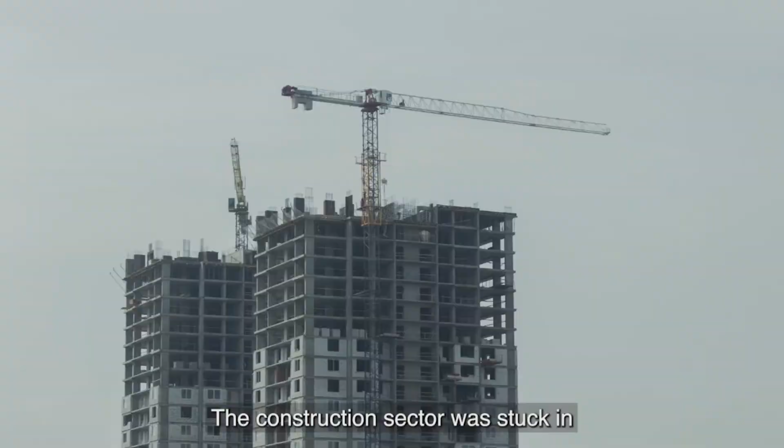The construction sector was stuck in a system that didn't work well for anyone, from the supply chain through to clients and even those using buildings. The system had evolved to produce the cheapest building rather than the one that provided the greatest value over its lifetime.

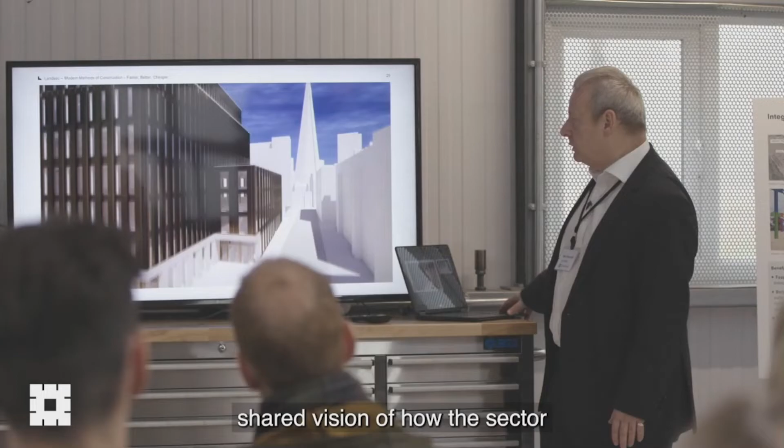The Transforming Construction Challenge was established in 2018 to accelerate the transition away from a labour-intensive approach to constructing buildings. It came with the largest investment in the sector by UK government in a generation, and a powerful shared vision of how the sector could better deliver buildings in a way that helped all of society, providing value over the lifetime of built assets, benefiting people using those buildings.

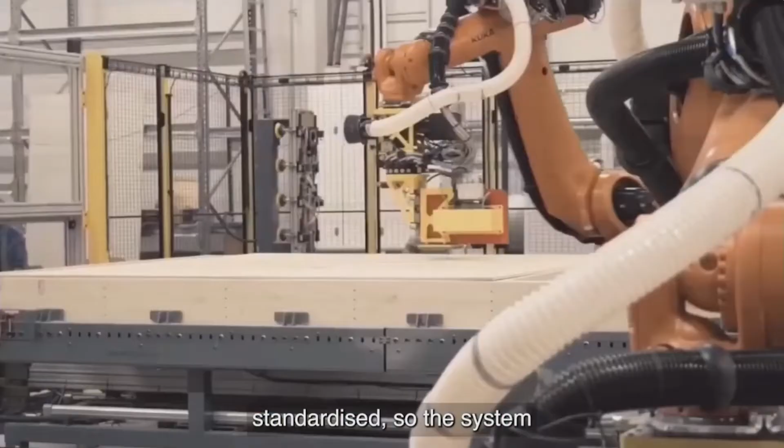Pioneers in construction collaborated with experts in manufacturing, digital and energy to develop new approaches. Build processes from supply chain through to site were standardised, so the system operated more like a factory, bringing greater efficiency and greater accuracy. Digital tools were adopted to better share information and track processes, to reduce wasteful steps. Renewable energy technologies were integrated into buildings to make them net zero, and part of the solution rather than the source of emissions.

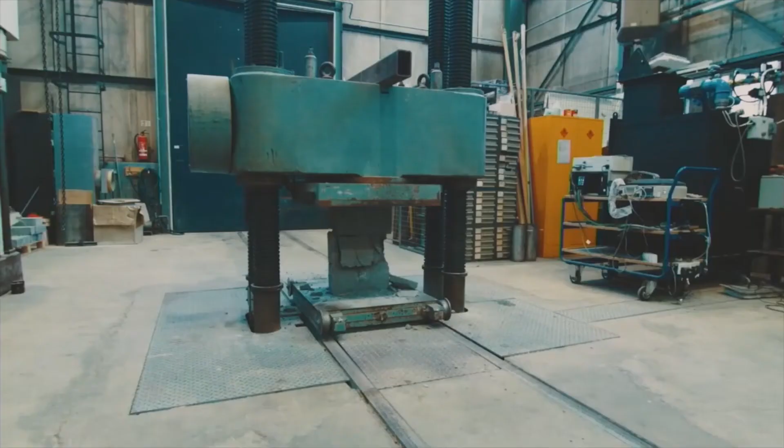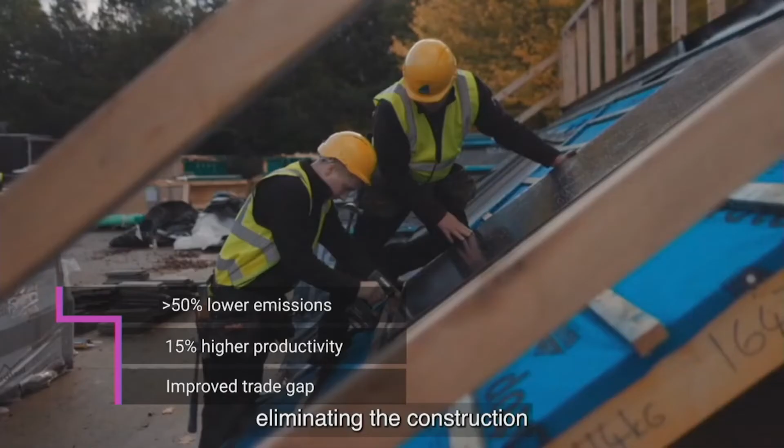The ecosystem to support this transformation has been put in place through an unprecedented collaboration between government and industry. Government procurement has changed to embrace new methods and provide the same global leadership it had in adopting building information modelling. The systems and evidence of success are now in place to deliver buildings and infrastructure 50% faster, more safely, at a third lower lifetime cost, and with lifetime emissions halved or even fully net zero, all the while eliminating the construction productivity gap with the rest of the economy and increasing exports.

Successes have been demonstrated across a range of building types.

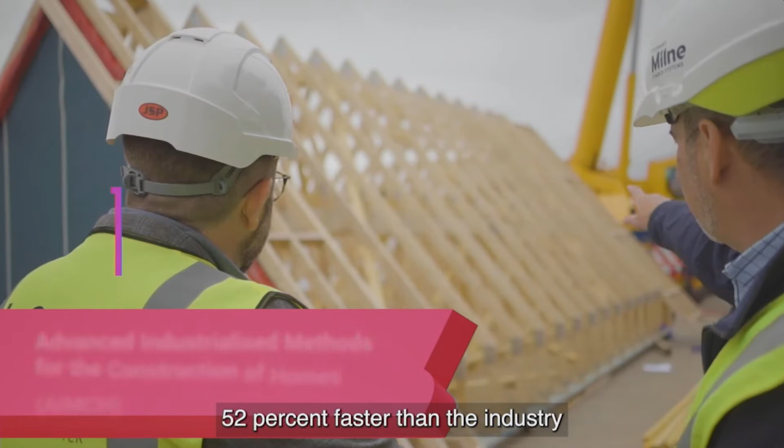AIMCH is building more homes 52% faster than the industry average with the same skilled workforce and at a similar cost. Our Sigma 2 closed panel system is pre-insulated in the factory, windows are factory fitted, the floor cassettes are pre-finished, and we have a ground direct roof system.

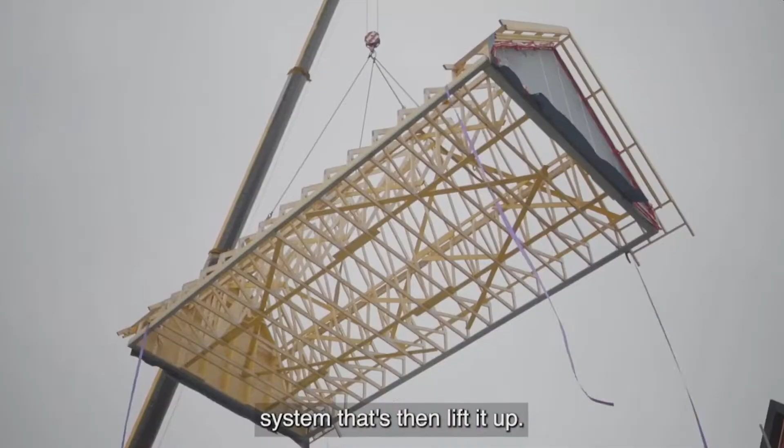The ground direct roof system is currently built on the deck beforehand. It's a structural timber system that's then lifted up. Through the project we're looking at innovations including demountable roof beams and pre-tiling the roof in the future, so we can tile it, put the fascia and soffit, and then lift the whole roof as one single module on wind and watertight, ideally without scaffolding.

The team led by Bristol City Council and YTKO have built Hope Rise, net zero carbon homes built over a car park for young people at risk of homelessness.

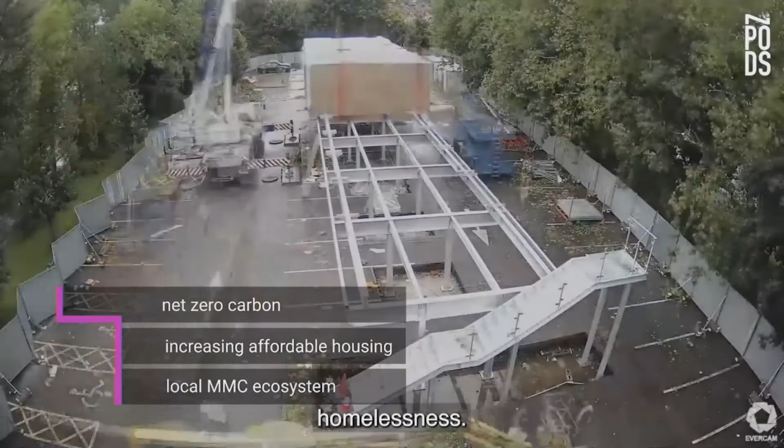It's a beautiful, spacious, peaceful place to live, and everybody that walks past is amazed and inspired about what can be done. It's awesome here.

We've got solar panels, we've got an airflow kind of heating system that's capturing the excess heat air and pumping it around the house.

The Active Building Centre is transforming construction and energy sectors by demonstrating and advancing best practice net zero carbon technology for active buildings, including a development with Flintshire County Council, meeting net zero at no extra cost.

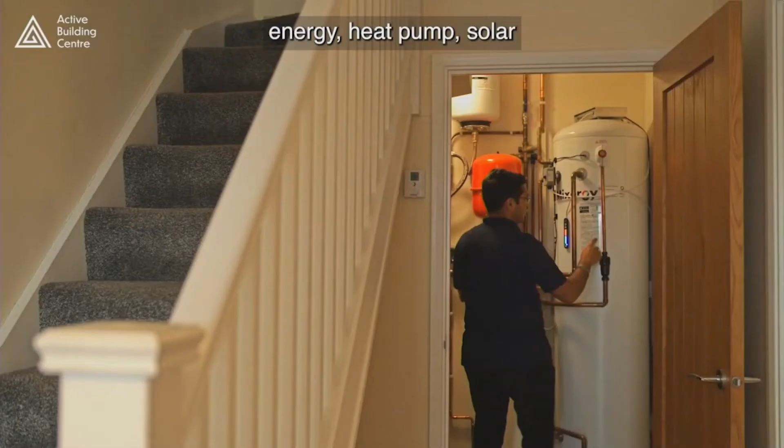It's 20 new social housing homes and they want them to be net zero carbon. In terms of clean energy, you've got ways to capture the energy, heat pumps, solar panels and so forth. You've got ways to store energy for when the sun isn't shining or the wind's not blowing. And then you've got control systems to make sure that you send the energy to the best possible place.

Global Home are leading the way in increasing productivity and quality in mass home building. These homes can not only improve lives now, but adapt to the lifestyles of households as they change and grow.

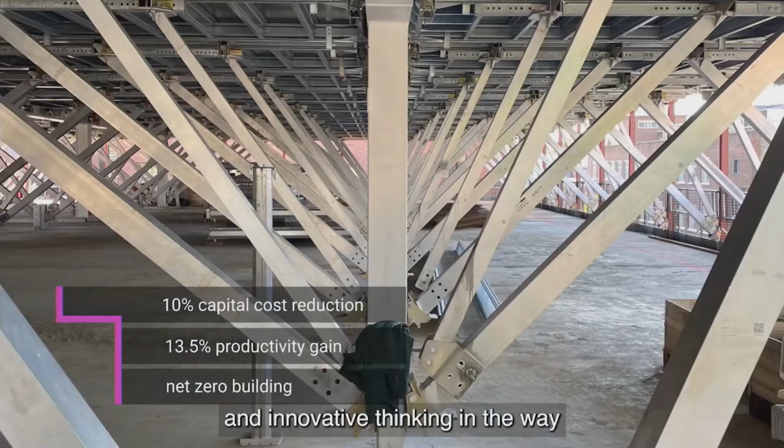The Forge, the world's first net zero carbon kit of parts office. This project really became a focus for our innovation and innovative thinking in the way that we need to design and develop buildings going forward.

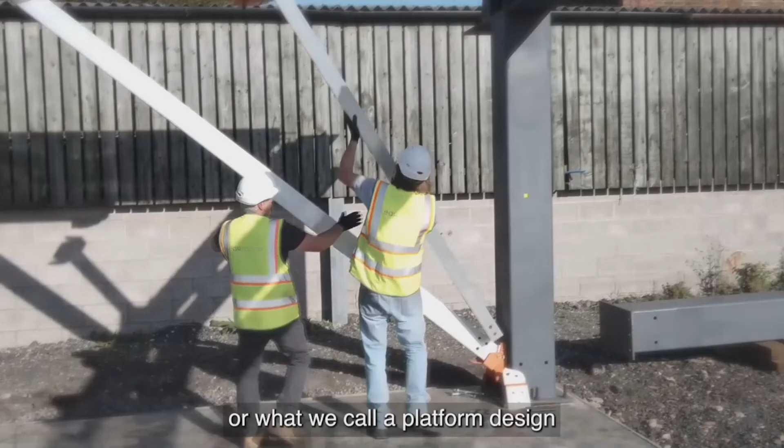At the heart of this strategy is the kit of parts approach to buildings, or what we call a platform design for manufacture and assembly approach. In the process of optimising the structure for the building, we've been able to minimise the use of materials, which has led to a significant reduction in embodied carbon.

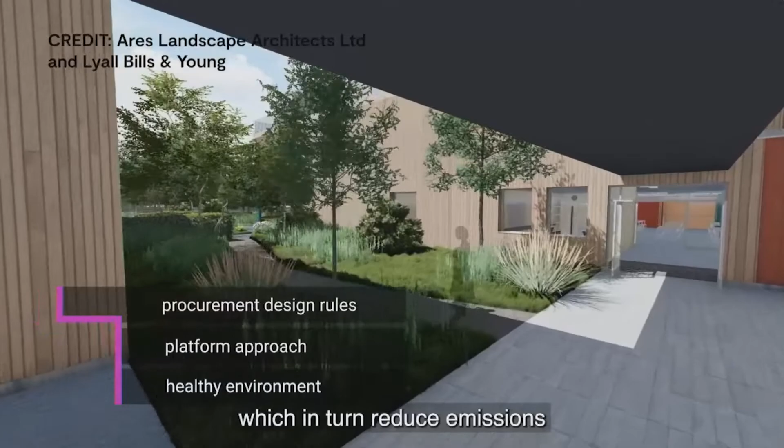The Department for Education has partnered with innovators to collectively invest £4 million in Gen Zero, transforming school buildings, creating new, improved design standards, which in turn reduce emissions and improve well-being for pupils and staff.

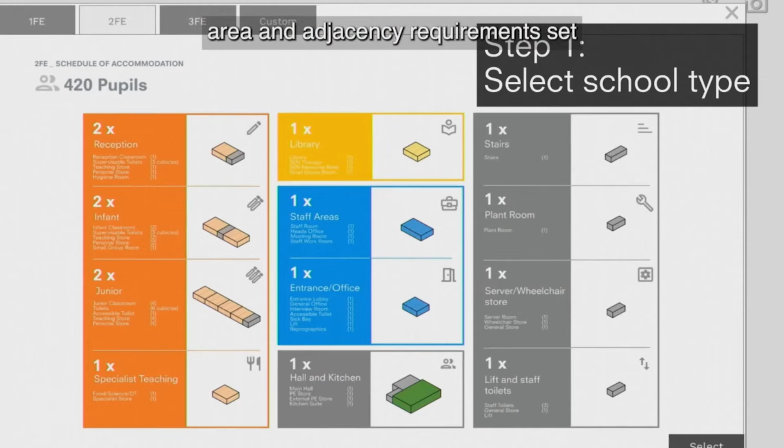Seismic brought together major supply chain players to standardise the design for steel framework used to construct schools. Seismic is delivering a 52% reduction in assembly time, digital designs taking minutes rather than weeks, and a 25% reduction in emissions associated with transport and materials. Traditionally, an architect will be employed to try and produce a feasibility study in line with area and adjacency requirements set by the Department for Education. This app seeks to pre-embed those area and adjacency requirements in the form of spatial design clusters.

TIES is delivering physical and digital demonstrators and data tools, improving productivity for the construction of transport infrastructure. The TIES Ava Footbridge approach will reduce embodied carbon content by up to 50% and operational energy emissions by up to 60%. The challenge addressed improvements across all phases of construction.

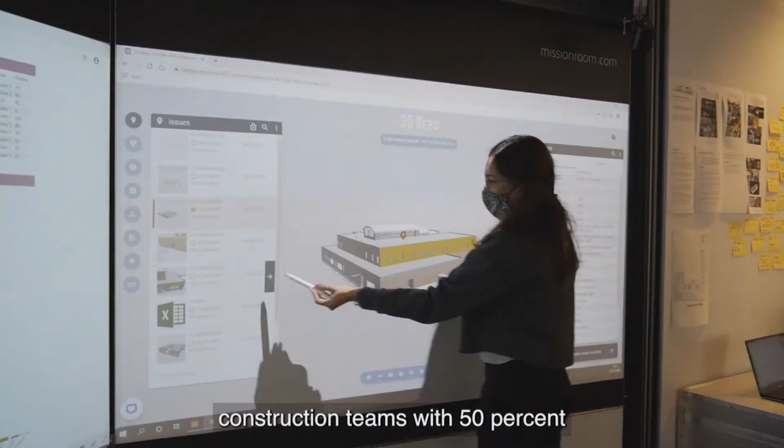The production control room provides construction teams with 50% more information, reducing daily briefings by 2.5 hours a week and resulting in a 40% reduction of time spent for planners. Reporting can now be produced at the click of a button, saving as much as 10 days on large construction projects.

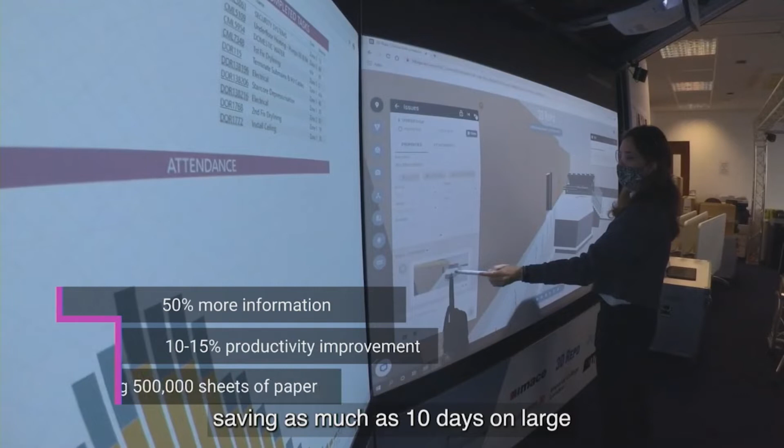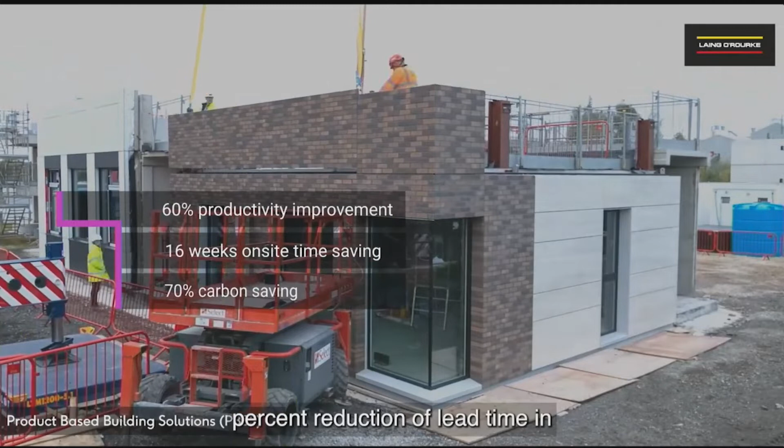Product-based building solutions streamlines the end-to-end project delivery process with a physically and digitally configurable kit of parts. It catalogues facades, structures, and mechanical and electrical elements, which can all integrate to form complete buildings. It means designers can not only select the best individual parts, but can make data-driven decisions about which components work best with each other and are most effective and efficient to assemble. The PBBS project has seen a 40% reduction of lead time in the manufacturing phase against an original target to reduce on-site building time by 30%.

And the learning camera, a camera monitoring system that learns to spot dangerous or suboptimal situations across a site, freeing up workers to concentrate on the task in hand. It also enables continuous remote monitoring.

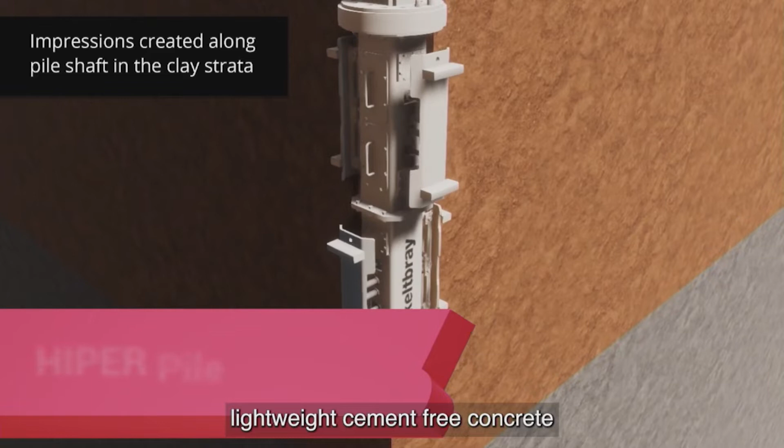HIPER Pile uses a hollow and impression pile design and lightweight, cement-free concrete to provide the same shaft-bearing capacity with fewer piles or narrower piles. The pile incorporates smart technology to monitor performance and integrate renewable technologies. HIPER Pile reduces materials and emissions by up to 80% and improves on-site productivity.

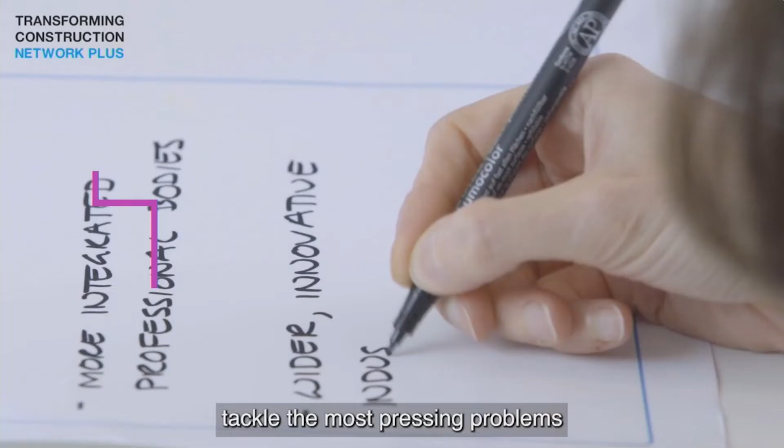The Transforming Construction Network Plus united academic researchers with industry and policy representatives to tackle the most pressing problems across the digital, energy, construction and manufacturing space. We're looking at a step change in knowledge and mindset and breadth of attitude, if you like, within our sector.

The Construction Innovation Hub brings together world-class expertise from the Manufacturing Technology Centre, BRE, and the Centre for Digital Built Britain. Value is key to unlocking the transformation of our sector. How we use it and how fast we can go requires all of you to play your part.

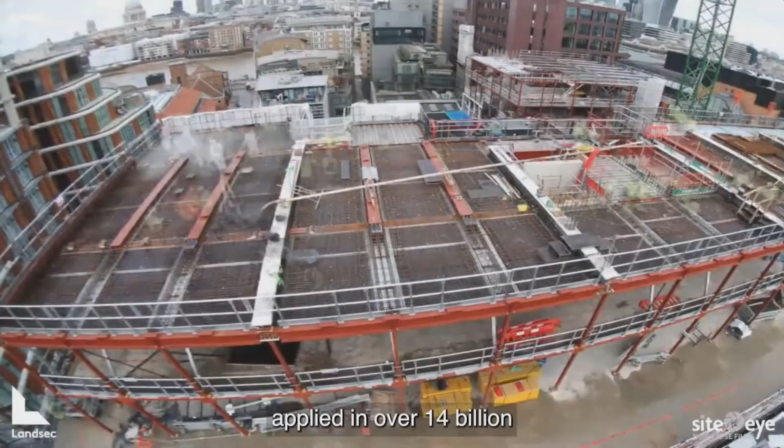The Construction Playbook and Transforming Infrastructure Performance Roadmap to 2030 are examples of UK government policy embedding this transformation. The results of projects Transforming Construction have supported are being applied on over £14 billion worth of developments, with the pipeline taking this over £25 billion in a few years. The shift away from delivering the cheapest building to providing value to society is accelerating.

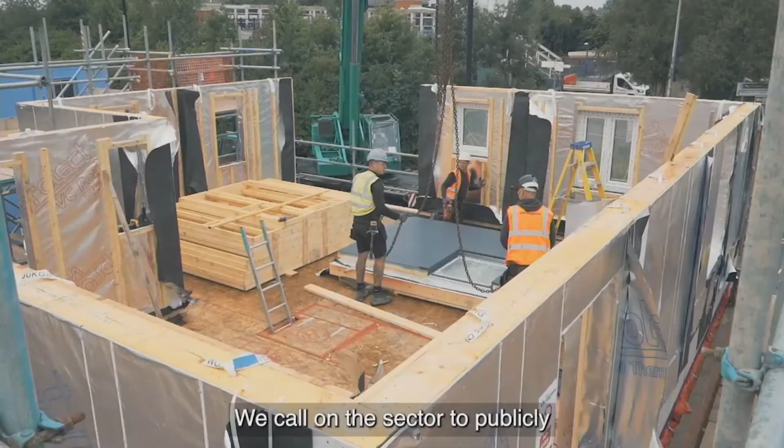How do we keep this transformation going? We call on the sector to publicly commit to platform systems, data-driven processes, and net zero innovation, embedding the impact of this unprecedented collaboration between government and industry will place construction as the exemplar in building back greener and better. Thank you to those of you who have been part of this challenge. And if you haven't yet, how can you be?

Thank you, Mike. It's great to be here today, and it's great to see you all. It is not that often these days that we get to talk to real people in a real place, and it's so wonderful to be able to do that.

One of my first visits as Construction Minister was to the MTC a number of months ago, and thank you again for hosting me. So it's lovely to be back again, and to be back on such an exciting day when we get to celebrate some of the successes which the construction industry is demonstrating and has shown, and see the foundations for a fantastic opportunity which the entire industry can take based on what the Transforming Construction Challenge has offered.

The government wants the UK to have the most efficient, technologically advanced green construction sector in the world. And it is through initiatives like this that we are able to take huge steps towards achieving that over the long term. When UKRI and Innovate UK began the Transforming Construction Challenge in 2018, they were tasked with revolutionising the industry. Through the challenge, we have accelerated industry modernisation towards this aim, reducing the whole life cost of buildings whilst increasing the sector's productivity and sustainability.

So the first thing I want to say as the Construction Minister, and being very proud to be here on behalf of government today, is thank you for everything you have done over such a long time to make this possible. You have demonstrated with your teams and your commitment and your initiative and your resolve, you have shown a journey, a way forward, which allows this industry to continue to transform in the years ahead, on top of all of the fantastic things that we have already seen on the video. So the first and most important thing I want to say is thank you.

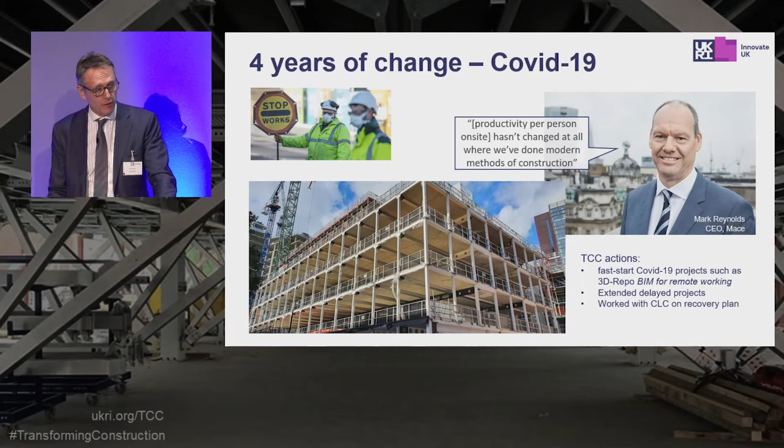The housing crisis was a priority for government following the 2019 general election. That immediacy meant that we needed to build more homes with the existing workforce, the key aim of our flagship AIMCH project. We also supported multiple projects on affordable and social housing. You've already seen some of these in the video.

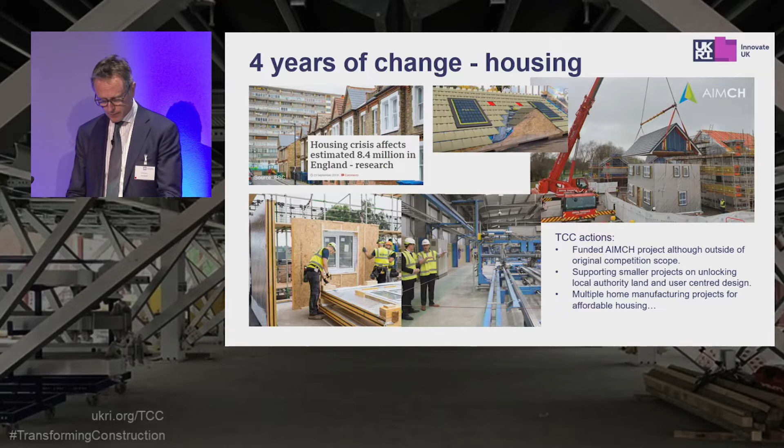These projects all use advanced modern methods of construction solutions to provide affordable housing. The IDEMA project is inspired by the Rubik's Cube and flat pack furniture to create easy-to-assemble homes. West Midlands DFMA is delivering factory-built social housing at scale and developing new regional supply chains. STELLAR has created hub factories, supplying regional spokes to satisfy those areas with the highest demand using local trades.

The CoLab Toolkit was developed to improve sharing of supply chain information, so housing projects are completed faster, at higher quality and at lower costs. And Project Ignite has developed a digital tendering and scheduling platform for housing associations using MMC, led by Places for People.

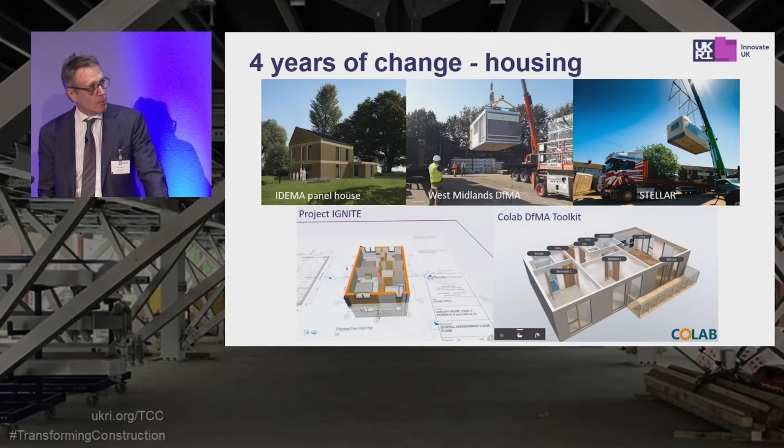We're proud to have developed a portfolio that is delivering some new solutions at all stages of construction: design through build and into use. Designing for whole life value, and in particular lower carbon emissions, needs new tools that work with existing design processes. From RIBA to Reality looks to embed better decisions at all RIBA stages to improve user productivity and reduce carbon.

Digitally connected supply chains help them see how a client wants the building to perform and suggests improvements. Cost and carbon calculator makes it easy for engineers to reduce embodied carbon in new buildings and keep costs down. And the AACE project has automated the mapping of cost and carbon into BIM models using artificial intelligence, enabling faster, better design choices.

Construction projects are complex and involve data from many different sources. The challenge supported a number of projects to automate bringing data together, to use modern digital tools so projects can be better planned and faster executed.

Moata developed an end-to-end custom information hub with Mott MacDonald. DCOM has digitised and automated compliance checking. AutoBIM was developed for Balfour Beatty to make completing BIM data easier and then automatically generate insights.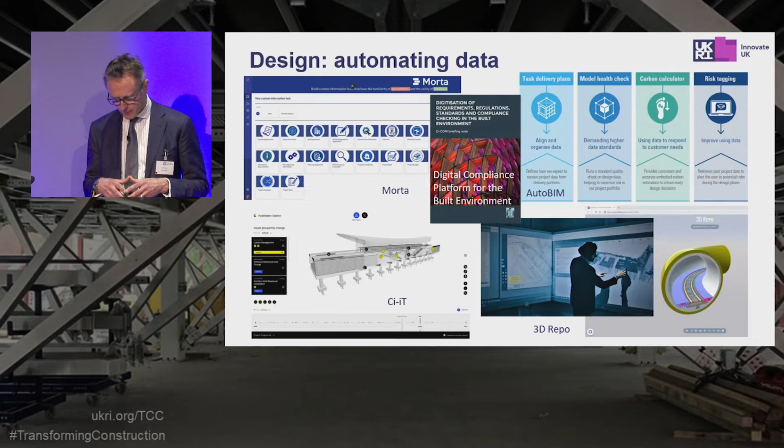Off-site manufacture of components is opening up the opportunity to automate processes for higher productivity and lower costs. HIBIS stands for Hybrid Insulated Steel System, an off-site component system combining light gauge steel with a mineral foam called Aerium. It overcomes the challenge of achieving high fire protection on multi-storey buildings at scale.

The Increasing Productivity through Off-Site Steel Modules project provided a set of design and construction prototypes to drive greater adoption. Tata Steel have led the Fast Truss demonstrator project to robotically weld steel trusses, automating their design and manufacture. Future Joinery Systems have done something similar for their bespoke joinery work, using algorithms to automate the design of complex geometries at the push of a button.

MART is a project to develop a factory and a shipping container for localised manufacture of carapace slates biocomposite roof tiles that are made using waste from Welsh slate.

Advances in technology mean data on a construction site can be used to better manage flows of materials and accommodate site conditions. So we've got the Weather Ledger, a data-enabled system that can automatically trigger weather clauses when terms are breached, avoiding contractual disputes. FairCop uses LiDAR technology to access real-time 3D data on localised wind speed and direction to maximise the productivity and safety of cranes on site.

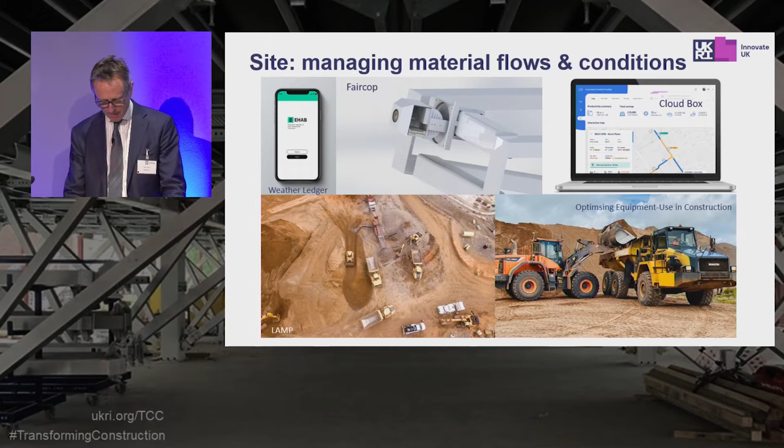Digital tools can also be used to plan and track progress across sites. We've got Aquila, which combines 3D models of a site, scheduling plans and real-time data from the project to synchronise activity and sequence equipment use to eliminate redundancy.

Plasma is a digital platform that uses digital data to map the most efficient programme to improve productivity right through the supply chain.

Contilio's intelligent control room uses LiDAR, laser scans and 360-degree photos, then compares them with the BIM model to track progress and highlight errors. And One Source of Truth is a project led by BAM Nuttall to build on the Learning Camera project and automate data collection through cameras to track progress by various project partners and minimise disputes.

A big part of the challenge approach is not to move construction sites into factories, but to apply manufacturing discipline at all stages, even on-site.

Adaptive learning for zero defects is a tool to ensure tasks are done right first time. It adapts to users' ability for action learning on the job. Further stage is HoloSite's augmented reality hard hat. It creates a hologram of the 3D model for the user, avoiding the need to interpret 2D drawings.

In a similar way, AROPCOA sends instructions directly to operatives who see them projected as 3D images. The headset also records video feedback for quality assurance. This is being trialled on the Hinkley C nuclear power plant.

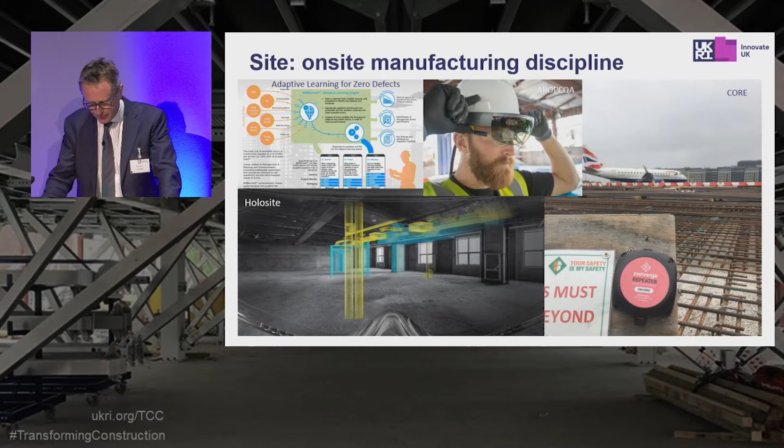The challenge has supported research to improve energy use in buildings. Heat 3D can quickly measure energy performance of a building in 3D. Traditional methods look at single points only and can cost 10 times as much as this. This will help measure and eliminate the performance gap between how a building is designed and how it operates. We worked with BSI to produce a standard for evaluating this gap.

The Active Building Centre works to make net zero buildings a reality via the capture, storage and control of clean energy. Alongside that, the Active Building Centre research programme is working with the Welsh Government on their commitment to net zero in a number of ways.

Gathering data on real-world performance of carbon-reducing technologies on the 2,000 homes under the optimised Retrofit programme and the new homes under its innovative housing programme.

ABC research programme is also running Behind the Meter Billing, a dynamic living lab collecting data about active buildings at community level to enable localised energy trading.

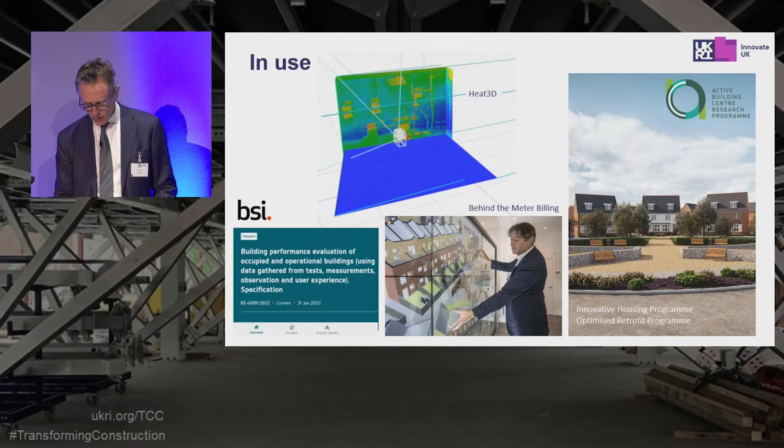So today we're handing all this information over to you. The groundwork is laid. These foundations will enable a stronger future for construction. The Transforming Construction Challenge has provided you with the methodology for value and platform approaches. It has proven and demonstrated that platform methods and active building technology can help us reach the targets we're all after. And with government, we've shifted the procurement of public buildings.

The stories and data these investments have produced are yours. Building on these foundations, we call for the sector to commit to the brighter future that we've all worked hard to make possible.

Achieving the full impact requires a cross-government approach to platforms, standardised assemblies and interfaces, with government suppliers and their clients using Transforming Construction Challenge outputs in line with the construction playbook to deliver the Transforming Infrastructure Performance targets. So thank you to everyone here, and thanks to my amazing team, without whom this wouldn't have been possible.

So thanks, everyone. It's been a great journey.

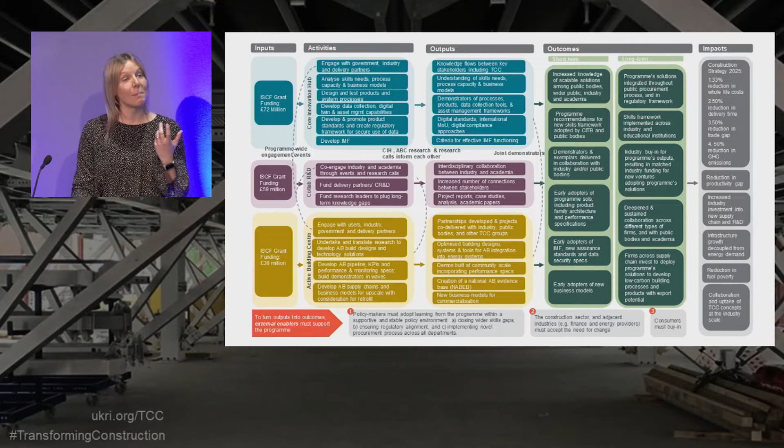This rather complicated looking logic model is how we have gathered that data and the assessments that Frontier Economics and BMG have used. Our benefits data, which you hear us talk about a lot, are based on this, and Frontier Economics' research was done via a combination of survey and expert panels. But I hope you'll see that the previous slide and this one, in terms of the themes and headings, are what we have based our assessment on.

I really hope you'll also see that when we were devising this with Frontier Economics, we really chose measures to help us understand the degree and extent of real-world take-up of these concepts. So we sought to increase and improve collaboration between construction, the energy, digital and manufacturing sectors, as well as with academia and government. And what we found from Frontier Economics' report was that collaboration has been higher for those that were successful in applying for funding.

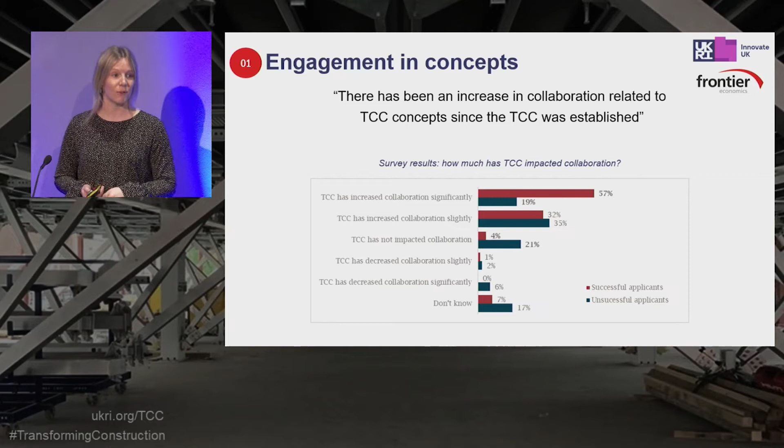We did seek wider engagement, for example through the Transforming Construction Network Plus and the Future of Consultancy programme with the ACE. We knew from the start that to be successful, we needed to see real-world application of TCC concepts, and for this to happen, procurement had to change. So the challenge worked with clients, in particular with government, to really raise levels of understanding and the potential benefits of procuring for value.

As part of Frontier Economics' report, they interviewed a number of stakeholders, some from the Department for Business, and I have a quote here that says: "Overall, we are seeing a big cultural change which is guided towards outcomes rather than inputs, and we are expecting a very positive impact from it."

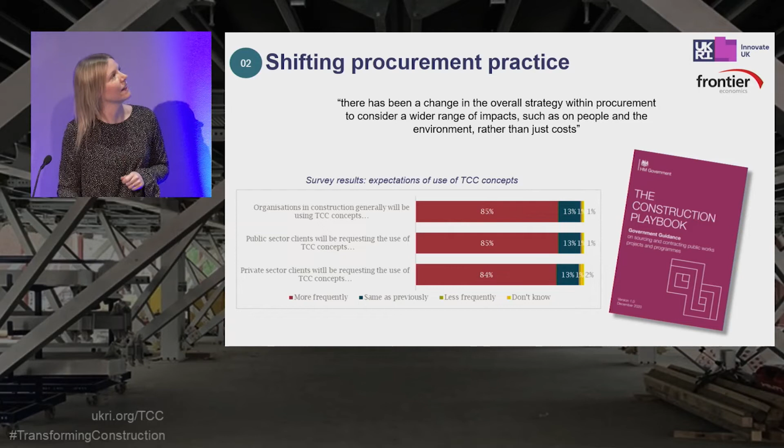The Construction Innovation Hub, in particular, worked really closely with government departments and helped write the construction playbook, which embeds TCC processes. Another quote from said BEIS stakeholder says a whole load of things are driving cultural change, for example worries about global warming. TCC is an important element of this, and without TCC we wouldn't see progress in quite the same way. TCC is good at bringing industry and government together. So if you were said BEIS stakeholder, thank you very much.

Now, we know, and you all know, that we set out to invest £170 million of public money, and that was to be matched by £250 million of investment by industry. The report finds that this will be met this year, but importantly, that industry investment will rise to over 800 million by 2027, something we're really proud of.

Examples of this include heavy investment by Stewart Milne, doubling their capacity in their timber systems; Future Joinery Systems, doubling the size of their team and their investment pipeline year on year; and Hadley Group, who have already acquired a new factory.

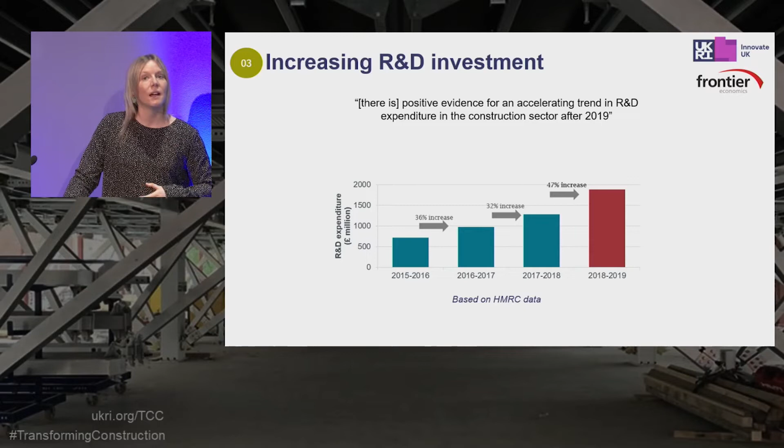We also all know that the sector works to tight margins, and the R&D of this type that we've supported needs to be applied on real buildings. Despite some of these potential constraints, we have seen leveraged investment across industry. The report found that some projects and businesses ended up spending 3 times the amount of the original commitment.

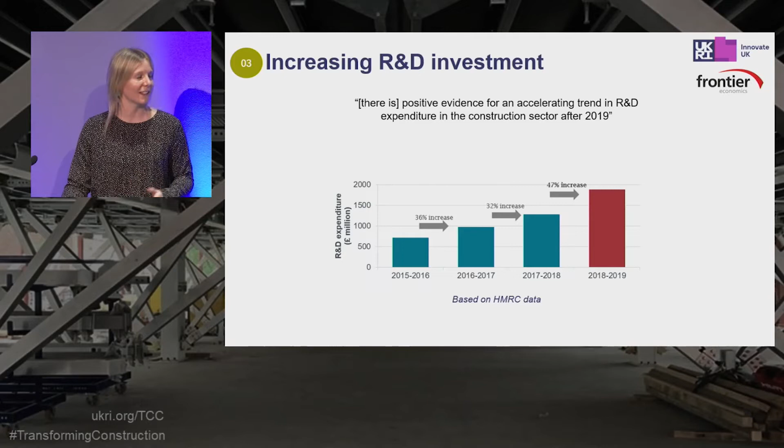Because of the strategic importance of the results, Laing O'Rourke, as leaders of the product-based building solutions demonstrator, are a great example of this. They have gone above and beyond when it comes to investing that commitment from industry. The concepts we've supported are new ways of working for the sector, and the challenge has helped accelerate a transition that was already underway.

This hasn't been about theoretical solutions, but real-world application. We've worked with early adopters and innovators on the diffusion of innovation, working to move towards the mainstream and that early and late majority. Uptake is resulting in high levels of real-world application on major projects, helping us towards the levels required for that tipping point and getting past the chasm on the diffusion of innovation.

Overall, successful applicants reported greater impact on annual revenue after engaging with the challenge. On surveying TCC participants on the impact of challenge concepts when used at scale, 92% reported a positive impact. Contilio is a great example of this, having run a very successful fundraising round in 2021 and securing a number of global clients.

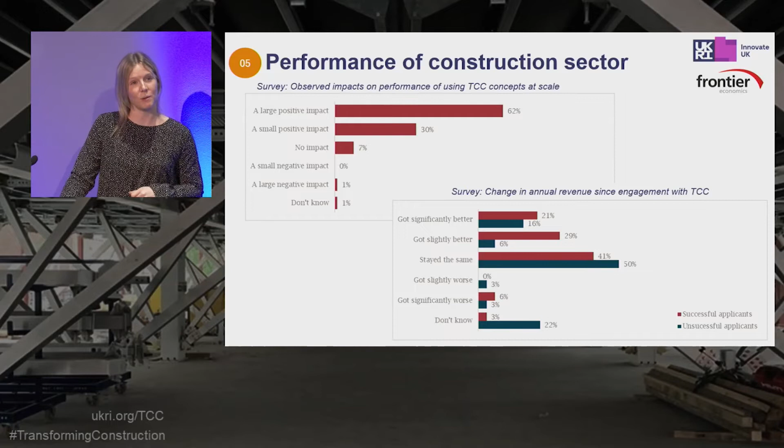So as you've heard, we set challenging targets for the value of real-world contracts being deployed on challenge outputs, and we're really proud that these have all been surpassed. You also all know that the construction sector generally lags behind by about 15% when it comes to productivity.

Billions of pounds worth of projects are closing that productivity gap, and the Forge is a brilliant example of that. The world's first net zero carbon kit of parts office is already realising around a 13% productivity improvement, but is striving for 35% productivity improvements. Some of our more recent data is already seeing greater improvements in productivity.

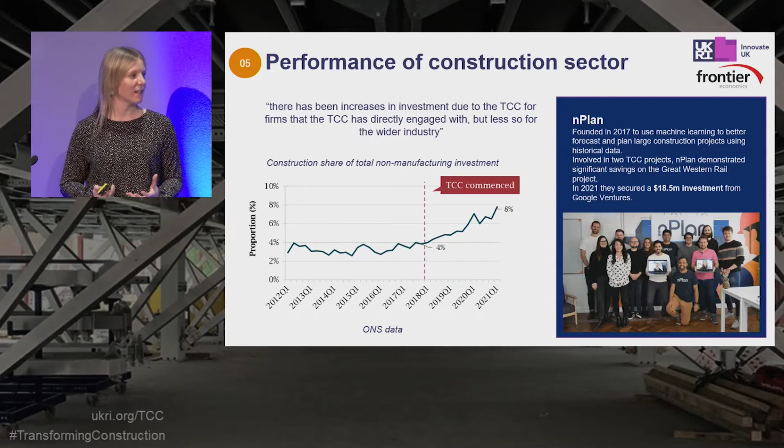The success of projects that we've supported has led to an increase in investment as well. A brilliant example of this cross-sector success is nPlan, who have been part of 2 of our projects. Last year they received an $18.5 million investment from Google Ventures, such a great example of the commercial value and worth of the projects that we've supported.

The challenge is forecast to deliver a £200 million improvement in the trade gap by 2026. And Converge, who have been part of 3 of our projects, are already delivering in Asia and have recently signed deals in Australia and New Zealand.

When it comes to improving the delivery of built assets through the reduction of whole life costs, the report estimates the savings generated from projects already underway today will more than cover the cost of the challenge investment. Specwall load bearing is already realising a whole life cost reduction of 60%, and we are already seeing even better improvements here as well, with improved delivery of built assets rising to 200 billion by 2027, something we're really proud of.

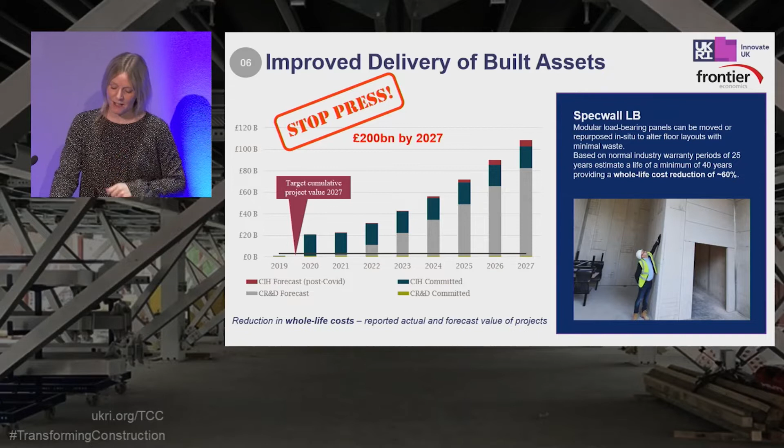Similarly, when it comes to the reduction of delivery time, you saw the TIES Living Lab footbridge approach in the video, realising a 66% reduction in their demonstration time, 12 weeks assembly as opposed to 35 weeks. What that means in real life is less disruption for users, and buildings and systems working better for people. Already we are seeing a reduction in delivery time worth £400 billion by 2027.

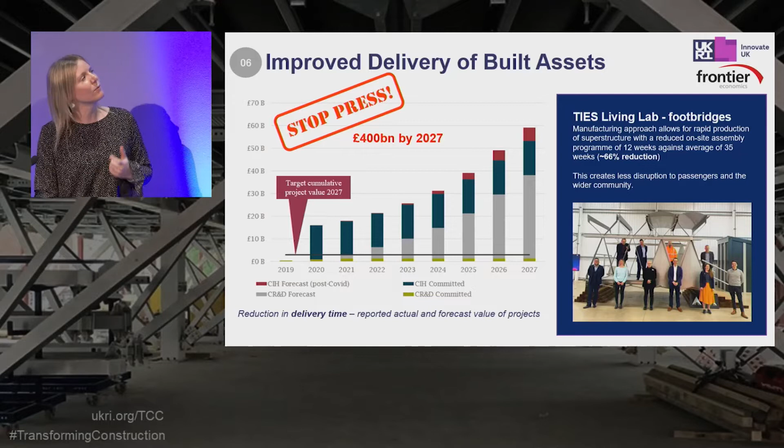Importantly, reduction in delivery time needs to go hand in hand with improved environmental performance, and that's something we've seen through Future-Proof, new investment models delivering net zero emission homes with guaranteed running costs, and the active building centre's work with Flintshire County Council, building affordable net zero homes at lower costs than previous methods.

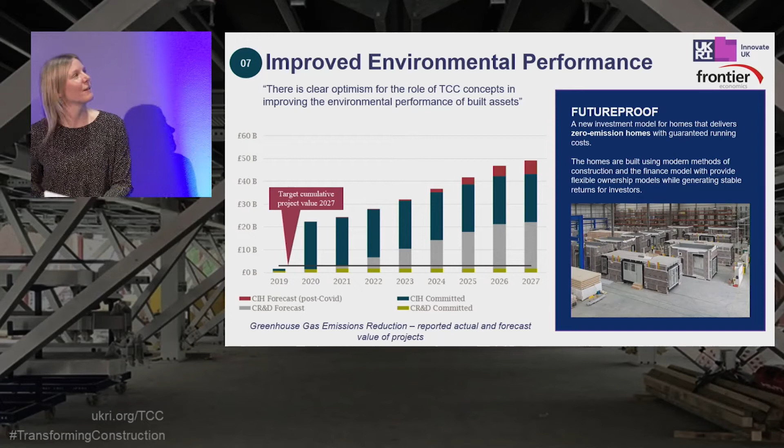So I hope that I've left you wanting more. I hope this has felt too quick, because I really want you to take a look at this report for yourself, read it, take it in and understand it from your perspective as well. This is a snapshot of the quantitative external proof of the challenge, but I'd also really encourage you to take a look at the richer stories and the qualitative progress as well.

The Transforming Construction brochure is outside for those of you in the room, but also able to access online. I'm sure everybody, and livestreamers in the room, has heard Mike and I talk about the Transforming Construction Stories catalogue. It is there for you to use to build your stories of innovation as well. So the groundwork has been laid for industry to continue to build on it. Thank you very much, and I look forward to continuing the conversation.

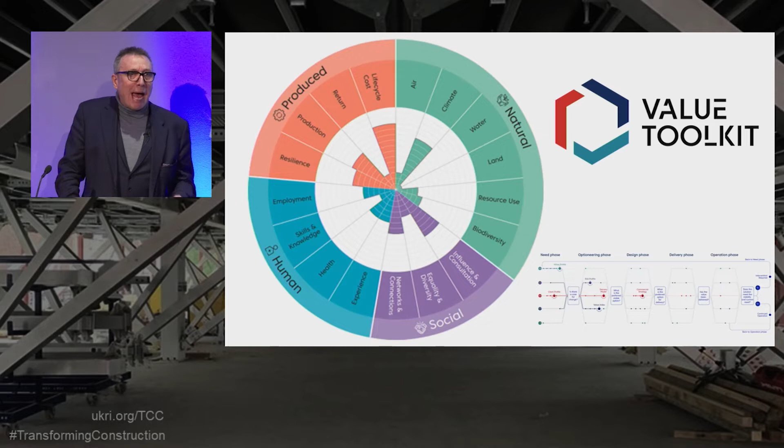We also have an engaged and enthusiastic industry that recognises the need to change, and are proactive in seeking ways to do it. It's been a real privilege for me and my team to work with so many inspiring and progressive businesses. We know capability and capacity in the market must grow so it's able to meet the ambitions of this challenge in full. It's encouraging that we are already seeing this growth, and it will continue if we maintain the collaborative spirit and ambition of the past few years.

The groundwork has been laid. Fantastic progress has been made, and we must continue to develop these solutions, to embed them at scale, and to build capability and capacity in both clients and the supply chain.

How do I see the future? My vision is for a better built environment delivered by a transformed sector, with a strong and supportive policy and regulatory environment, widely understood and consistently applied, with clients seeking value and performance, using digital tools and data smartly, not buying cheapness and inconsistency, with UK businesses, large and small, confident to invest, applying the innovations enabled through this challenge to reduce carbon, improve value, and much more. And a thriving sector that attracts and develops the best talent and that better reflects the society we all serve.

If we can build on the great progress made, rather than basking in the achievements to date, then we will cross that threshold. Together, we will deliver a built environment that creates real value for our society. That's what I'm passionate about. That's what the Construction Innovation Hub wants to see. And it's a vision we can and should all get behind.

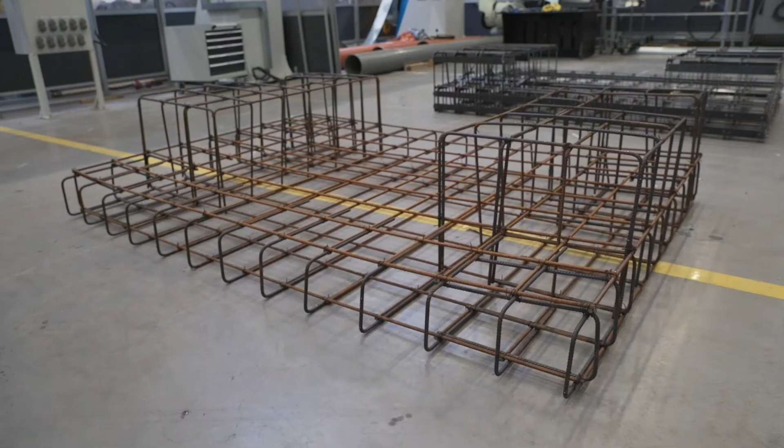One example of where the digitally connected laser cell is currently being used is to cut sheet metal for laser cut reinforcement. This is an alternative approach of reinforcing concrete. In the display area, you'll see 2 different methods of reinforcing concrete.

One, which I think you'll agree, is much more recognisable and traditional in its approach. This is made up of low-cost material which is assembled by a highly skilled workforce. The workforce often spend long periods of the days in positions that are detrimental to their long-term health. This, coupled with wet, cold, muddy conditions, often leads to high levels of variation in the final assembly.

The alternative laser cut reinforced cage is an example of where the Construction Innovation Hub has worked alongside MetLase to reimagine the technology. Currently, in industry, there are examples of companies who are trying to automate the tying of rebar. We have taken an alternative approach to this, and we have redesigned the product so that automation is no longer required.

Utilising unskilled labour to assemble the two demonstration pieces highlighted an 85% reduction in assembly time and also a reduction in geometric variation. This is due to the innovative approach of the laser cut reinforced cage. This allows for the laser cut cage to be truly optimised and to remove excess sheet steel and concrete, reducing the embodied carbon. You're now going to hear from Dave Allen at MetLase, who's going to talk about further industrial work and its impact.

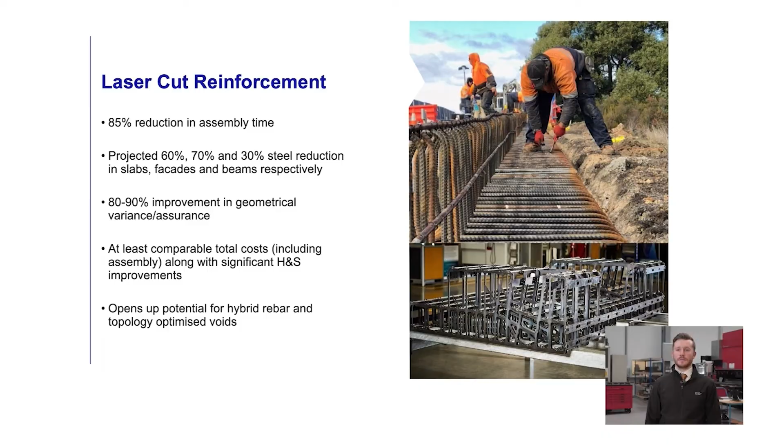The MTC approached MetLase to help explore the opportunity to introduce sheet metal as an alternative to conventional rebar. MetLase has a proven track record of using its technologies to solve complex problems in advanced manufacturing sectors. Since designing the MTC demonstrator in 2018, we have continued to explore the wider opportunities for the construction industry offered by our transformative technologies. In conjunction with academia and industrial partners, including the University of Sheffield, Leeds Beckett University, PC Limited and Roger Bullivant, MetLase has developed LCR to a stage where it is now a viable method of concrete reinforcement. The technology is attracting the interest of a number of other construction companies.

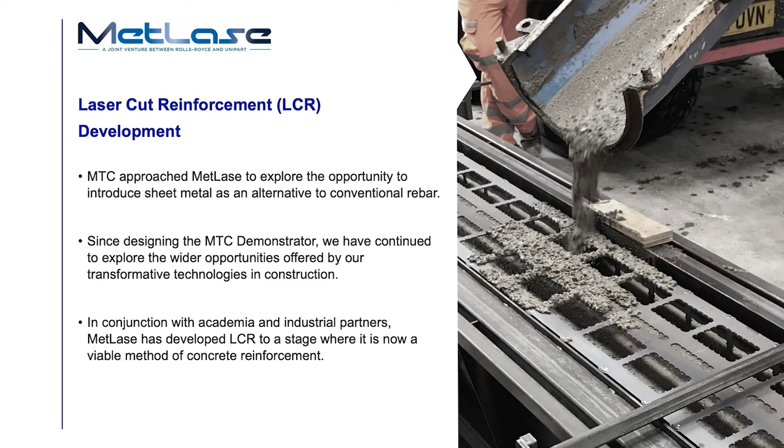It has been shown to provide a number of significant benefits. Optimized solutions have been developed for all common reinforced concrete elements. This means that LCR is available for a range of applications from foundations to facades. LCR helps improve productivity both on and off site.

Optimized reinforcement frames can be provided fully assembled. These include all ancillary components, saving setup time prior to casting. The whole process is de-skilled, eliminating the need for specialist installation. LCR therefore facilitates significant reductions in manufacturing time and program duration.

LCR also contributes to sustainability and carbon reduction. Through optimization, reinforcement volumes can be reduced by up to 50%. More complex geometries can be achieved, facilitating additional concrete volume reductions. And in precast applications, its inherent accuracy facilitates further safety factor reduction.

The commercial viability of LCR has been established for a number of precast and in-situ applications. MetLase are keen to review new opportunities. If you would like to discuss a potential application, please contact me on the email address shown. Thank you.

Together with Bryden Wood, we've been developing a demonstration component utilising the digitally connected fabrication process flow. This is traditionally made up of four components of varying thicknesses that is assembled by skilled operators using jigs and fixtures to achieve positional accuracy. This, similarly to the reinforcing process, is currently reliant on their skills.

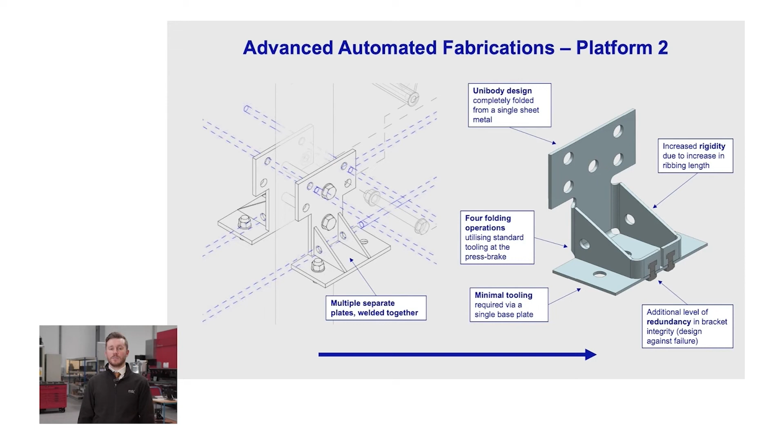Once the unibody component has been cut by the laser cell, it is then transferred to the CNC press brake. This is where the digital model is uploaded into the software and it automatically selects the tooling and the bending sequence for the component. You'll now see James bending the component.

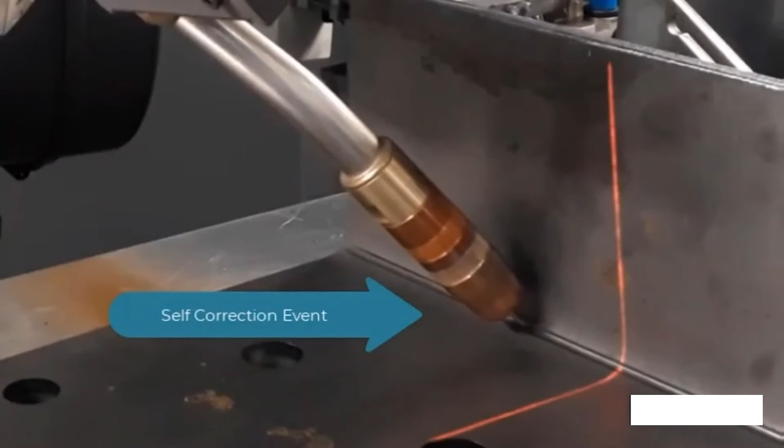The bent part is then transferred to the robotic MIG welding cell. When talking to SMEs about potential barriers to adoption for robotics, they often state the large changeover times and the huge costs involved with robot programmers. This is mitigated through the upload of digital models and the automatic programming of the robot controller, which removes the need for this costly resource.

The key points I'd like to leave you with today are the use of robust and repeatable processes so that we can quantify a product's performance, the use of digital processes so that we can open up a pool of resource, and the transfer of technologies that are proven in other sectors to construction.

We've just seen how the MTC is working on standardising manufacturing processes which allow us to work in a flexible way to make construction components. Another thing that we need to do is, as well as standardising processes, we need to look at how we can work with supply chains to work together on different projects.

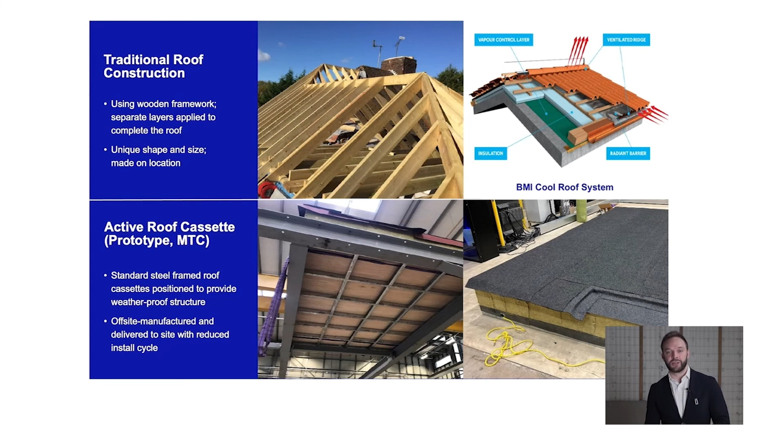So now if we look at a wider sense at some of the sub-assemblies that we've prototyped on the Sandpit, I'm going to talk about three in particular. So we've talked about the active roof. This is designed to look at factors such as thermal performance, integration between adjacent roof cassettes, and the opportunity to do ongoing maintenance on the cassettes once installed.

We've then got external walls. Now these again are a standardized product, lightweight, flexible, can carry services. We can have integrated windows and things that are again pre-installed into the products before installation, and they provide opportunities for attachment of different facades internally and externally.

Then, to be installed on the Sandpit, we have the internal wall subassembly. Again, these can be configured to carry different technologies and different services and provide the opportunity for ongoing upgrades or changing of the internal look of a building.

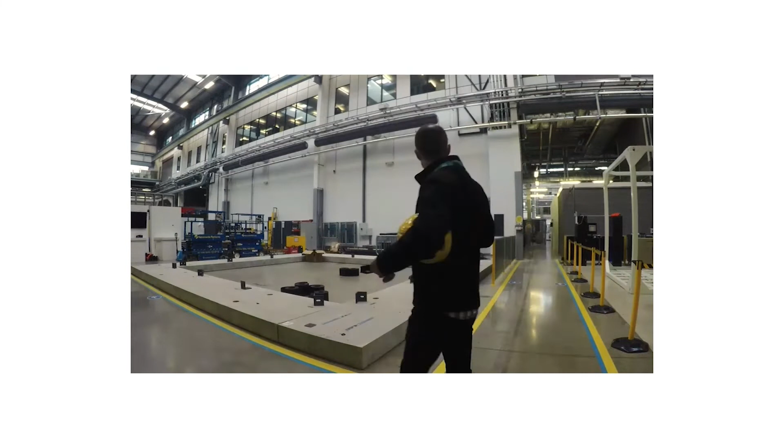So now we're going to see a time lapse of the build process for the Sandpit, and you'll see things such as the construction of the steel frame with the concrete base and plinth. You'll see construction of the roof cassettes themselves, and then you'll see the installation process for both the roof cassettes and for the external walls.

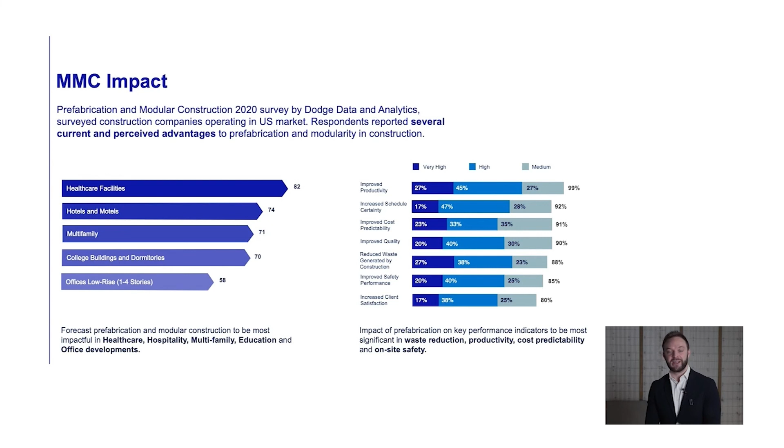So here we can see some views and opinions from the industry around the barriers and the benefits of the application of modern methods of construction.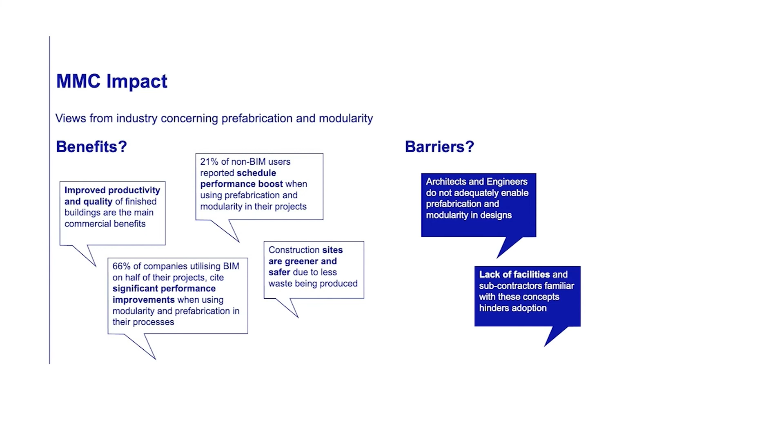We're moving on from the Construction Innovation Hub Sandpit building to the work that we're doing on automated assembly. This work is critical to supporting the use of modern methods of construction. As more components and sub-assemblies are made off-site, there is an increased reliance on lifting and assembling those components on a real building site. The sector has been very reliant on traditional methodologies like using cranes and even people to lift components like glazing panels into position.

We really want to change that. We want to look at how these assembly operations can be done in a more productive and safer way, whilst giving better assurance for the outcome. We're going to look at a number of technologies that can handle volumetric components, panelised components, or even discrete sticks, bits, corners and columns to put buildings together.

Hello, I'm Phil Jackson, a technical specialist in the automation and robotics domain here at the MTC.

General manufacturing and construction down the years have evolved very differently. In fact, we're now seeing levels of productivity and consistent quality in our factory manufacturing sites that we could only really dream of a few years ago. The Construction Innovation Hub recognised there's a huge amount of value that can be gained by taking some of these hard-won techniques and technologies from general manufacturing and putting them to task in the construction sector. But how did we achieve such high levels of quality, consistency and productivity in our factories? Well, in short, by carefully controlling the environment and ensuring the manufacturing processes are as consistent as possible. That means the environment is consistent, the products we're manufacturing are consistent, and all the processes are consistent. That is difficult to port over to construction.

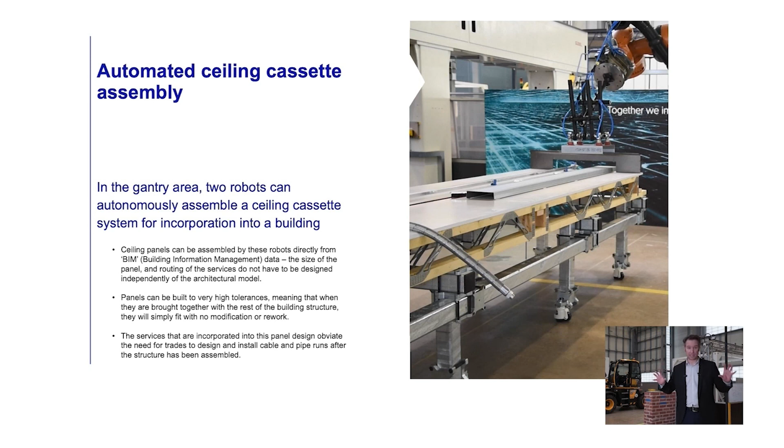So we have here also a ceiling panel assembly demonstrator. What's really powerful about this concept is that these ceiling panels can be assembled on the basis of building information management data - directly from architectural designs, this system can put together a panel of the right dimensions and with the right services running through it to fit directly into the proposed building. The robots are capable of picking and placing the electric services and water services, and putting together all the contents of the assembly into the right places, ready for this panel to be picked up, put onto a truck, taken to site, and then assembled automatically into the structure of a building.

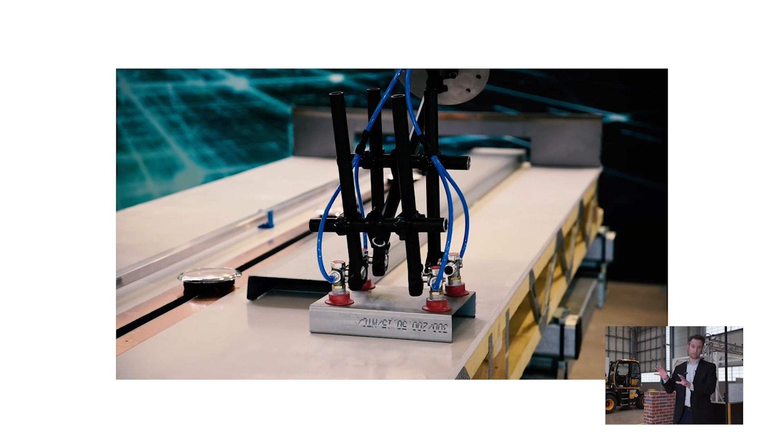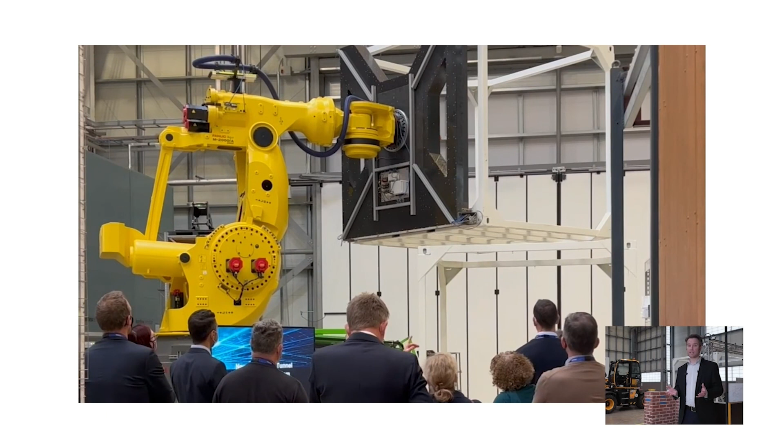Now, of course, being able to manufacture panels itself is not particularly useful unless we can rapidly form the volume of the structure itself. So what we're seeing here is a large industrial robot we've developed that can detect where these large volumetric cubes are in space, find a path to picking them up, and accurately position them on top of each other in order to start forming a large-scale structure.

We've used laser scanning technology once again, both for safety, to make sure nobody is in the perimeter of the machine whilst things are being moved around through the air, and also to allow the robot to understand both where its own payload is and where the payload needs to be placed.

Not only is this a more efficient way of working than using craneage, once again you're not using 6 people to do the job, but it's also safer.

The laser ranging system is used to detect objects or people in the perimeter of the machine. If anyone's detected in the perimeter, the machine will automatically lock up and stop, but this also prevents damage from happening. Remember, these pick and place activities happen precisely and repeatably, ensuring parts are installed precisely and repeatably every time.

The process is also, for this reason, quicker than doing it manually. The robot can find its mark immediately within a short time scale.

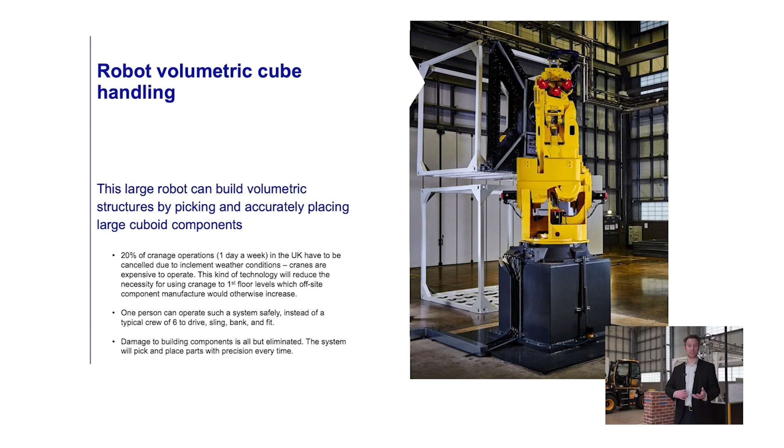Now, you may look at this large robot and find it hard to imagine such a system on a construction site, and I'd agree, it would look slightly misfitting. However, how about this machine?

Here's a JCB Hydrodig. We've ported over these technologies and techniques that I've discussed with the previous projects into the JCB Hydrodig, which of course is a machine much more adapted to be in a construction environment. We have effectively robotized this machine.

What does that mean? Well, it means that we're able to control the machine as if it was an industrial robot. We've developed control techniques that we would usually use in the industrial robotics domain in order to remotely control the robot, to program various different movements on it, and also to augment the work of whoever is driving the system.

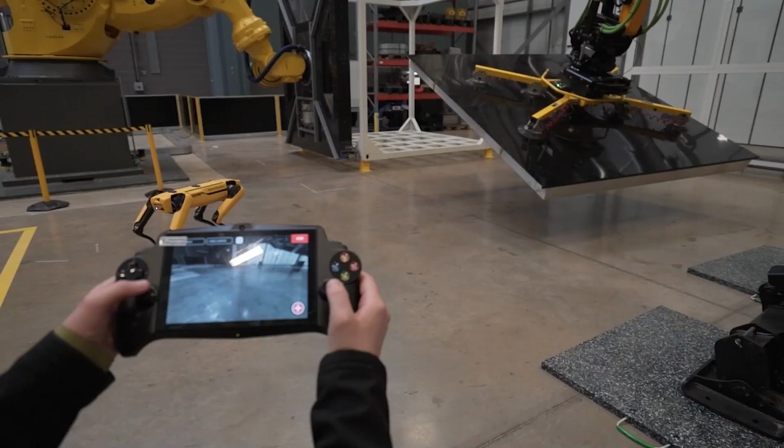So still, a human driver can use this machine to traverse across the site to get it to where it needs to be in order to do some work that requires a high level of precision, and then the driver-assist robotic tools can take over.

Now, that might be accurately picking and placing a large-scale building component, or it could in fact be digging a trench to a very precise depth. Or let's imagine there's GPS data involved in looking at where underground infrastructure might be, and it's very important that we avoid that. All of these things are made possible by the work that the Construction Innovation Hub has been doing with this technology.

This big yellow robot represents an evolution of the kind of plant that we can expect to see in the future.

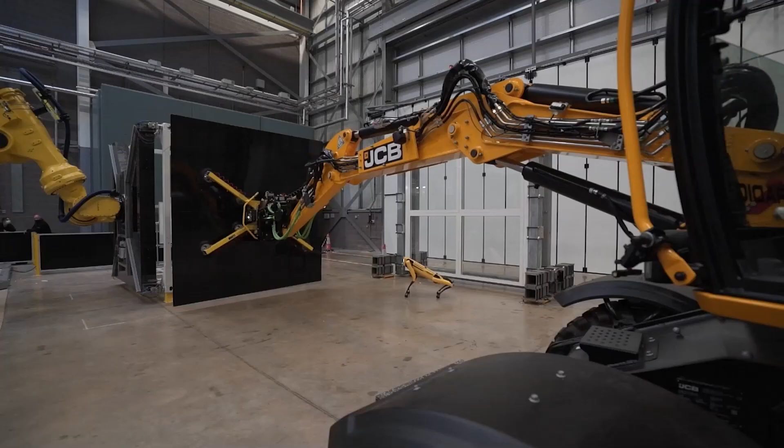At Mace, we talk about a vision for the sector that sees us moving from construction to production, increasing the industrialization, automation, and pre-manufactured value of the buildings and infrastructure across all sectors and all geographies.

The construction sector is modernizing. Our application of off-site is growing, no doubt, but the use of robotics and automation to support us to do so still feels quite nascent within the industry.

The Construction Innovation Hub is helping by developing, demonstrating, and transferring technology with a proven high level of established value already from other industries into the construction sector. A huge amount of work is being done by the team to break down the silos between the robotics and automation suppliers used for general manufacturing in factories and the construction equipment market and materials providers.

We're really demonstrating what might be the art of the possible for the sector. And there is an enormous amount to be gained by adopting this technology: skills, carbon, productivity.

But it requires a fundamental change in the approach to how we construct, which is why the Hub's role is showing the way and providing a space for the industry to collaborate, which is proving to be very important.

The construction sector deal set some really challenging targets: reducing the time frame for putting buildings up by 50%, reducing their through-life costs by a third, improving productivity, reducing the skills gap, and improving exports from the UK.